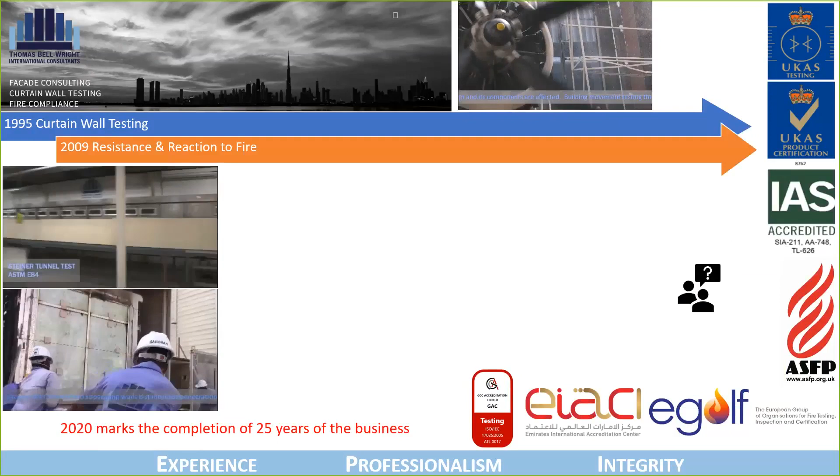We moved on from there to offer fire tests. We started offering fire tests by adding a furnace and a Steiner tunnel.

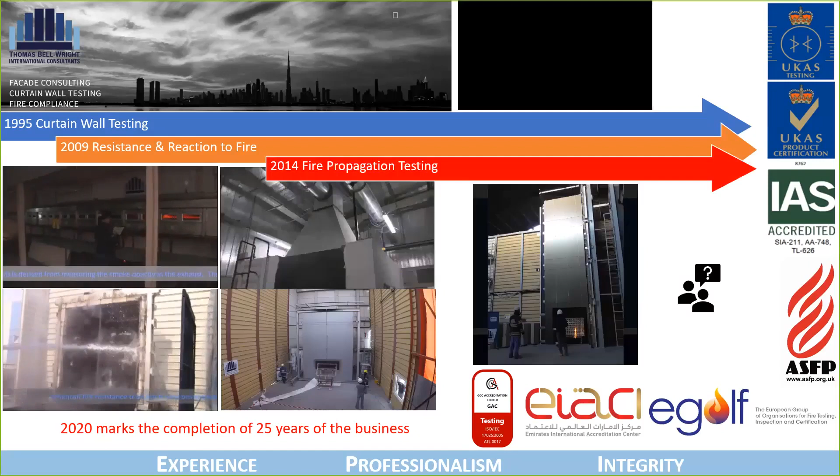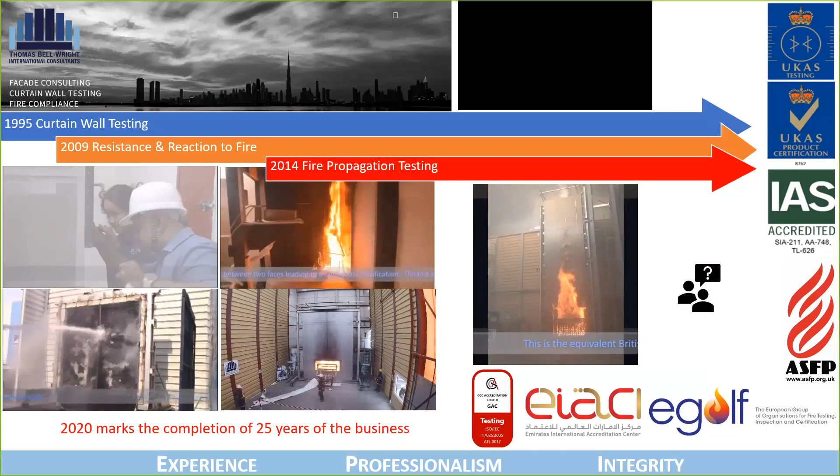We continued to add more and more capabilities. So we now offer reaction to fire tests and fire propagation tests for cladding material and cladding systems.

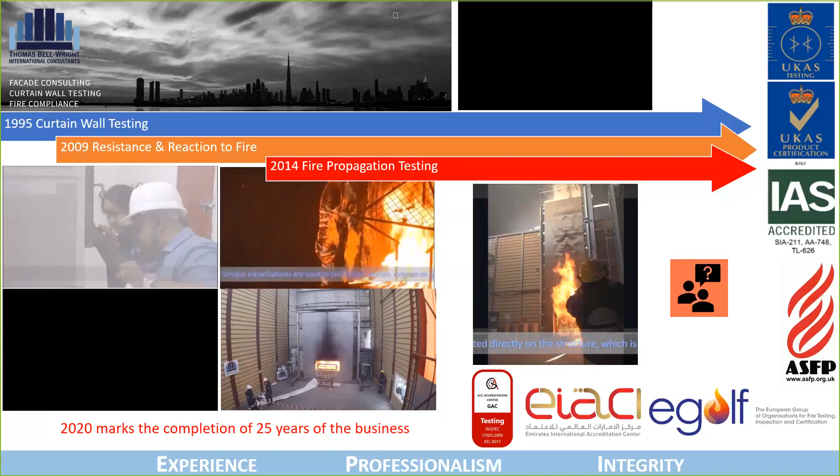Moving on, I will be straight away jumping into the topic of cladding and cladding fires. A lot of us are familiar with this challenge that has been in front of a lot of people in a lot of jurisdictions across the world.

We have been involved with several stakeholders in the industry who are related to cladding, whether it is manufacturers of materials, contractors, consultants, regulators, and so on and so forth. We supported the industry on the two-pronged problem that arose.

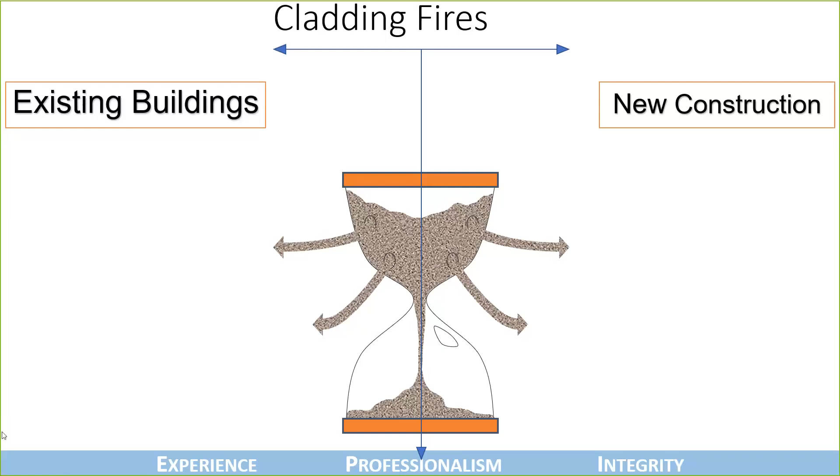The problem was for the existing buildings, and the problem was for the new buildings. For the existing buildings, we supported the development of a tool developed by NFPA from the United States. The tool was an offering that helped building owners assess the risk of their existing buildings.

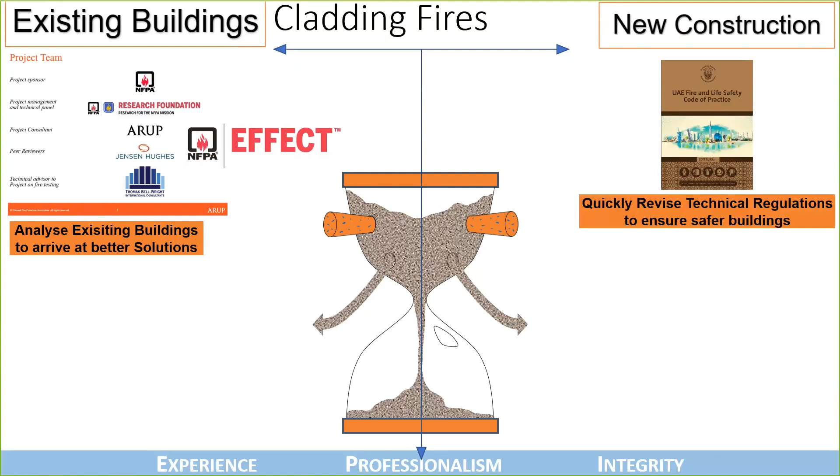We supported the UAE civil defense in enhancing their fire and life safety code. They came up with very detailed requirements for ensuring that cladding material being installed in new buildings is safer. We also launched our own certification program, becoming an accredited certification body to enable people across the industry to comply with the UAE Fire and Life Safety Code of Practice.

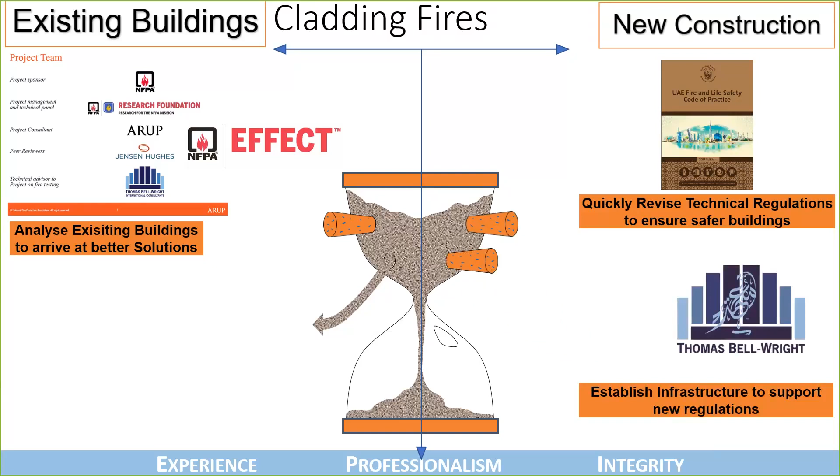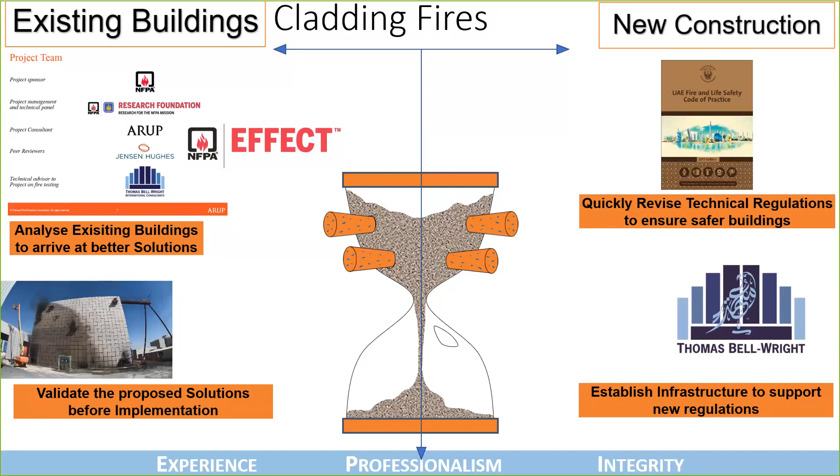With this as a background about us, I'm going to jump in and talk about risk. There are lots and lots of risks in the construction industry. As we talk very specific to risk related to facade fires, I'm going to touch upon some things which are very basic to the complete construction process.

This basic is the concept related to procurement or selection of what we buy. Now, irrespective of the function that we may be - as an architect, as a contractor, as a consultant, as a manufacturer of materials, or a regulator - we are all buyers in some or the other sense as human beings.

Now, as buyers, we buy everything and anything that we require. This ranges from electrical appliances for our homes, right up to products that we may require for our organizations and so on and so forth.

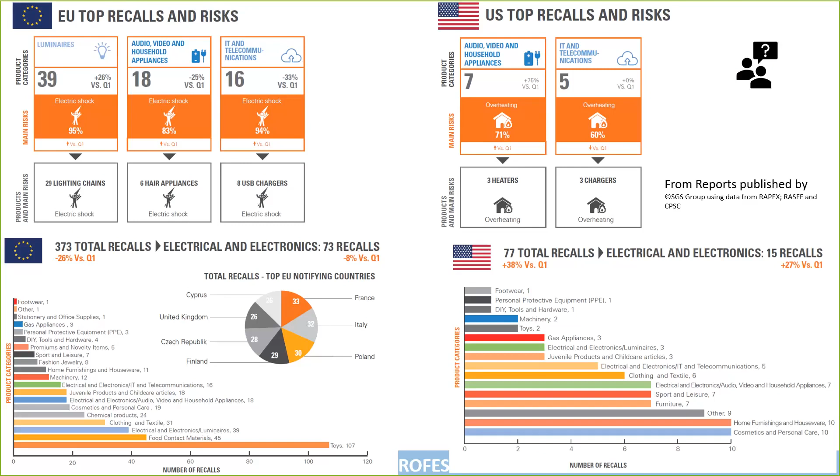A lot of us are familiar with the fact that jurisdictions have a very good mechanism for several kinds of products which are considered high risk for us. You will see some graphs and some data on your screens.

This is data that I have collected from a third-party body called SGS. You would notice that the bottom line on the graph talks about toys, which means this lists the total number of product recalls in the electrical and electronic segment. A good percentage of these products are recalled because they pose a threat to human life.

Now, for those who may not be familiar with product recall as a concept, many jurisdictions in the world have mandatory government laws which push manufacturers or suppliers to recall products that can pose a threat to anybody's life. So there is a system in place, which is a product recall.

I guess a lot of you would be familiar with product recalls, as the automotive industry and the consumer electronics industry has been rolling out many international product recalls. The Samsung Note was a classic case, but it continues across in terms of batteries being recalled, car parts being recalled, and so on and so forth.

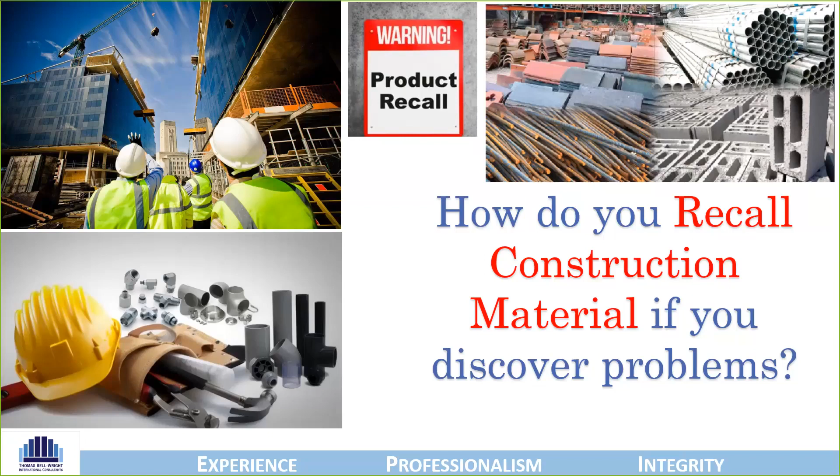This situation, that you cannot really recall products in the construction industry, has a very big repercussion. This forms the basis of the biggest risk when it comes to many different scenarios that can happen for any stakeholder in the complete construction process, fires being one of many, but there are several risks. Depending on the jurisdiction and legal framework you sit in as a supplier, developer, or contractor, you could face different kinds of risks.

Now, all of these risks eventually convert into potential risks and liabilities for several stakeholders. I'm going to walk you through an example of the fire risk in cladding, what the industry has been missing out on, and how that gap is being filled in by various tools around the world.

I'll take an example of the building envelope, from the time the elevation is visualized to the time the building envelope is commissioned. Obviously, there are lots of steps involved. Many of these have been analyzed as part of risk assessments and evaluations done to investigate accidents in the building envelope and facade space around the world, ranging from the Grenfell tragedy up to cases and decisions across Australia, and everywhere in between.

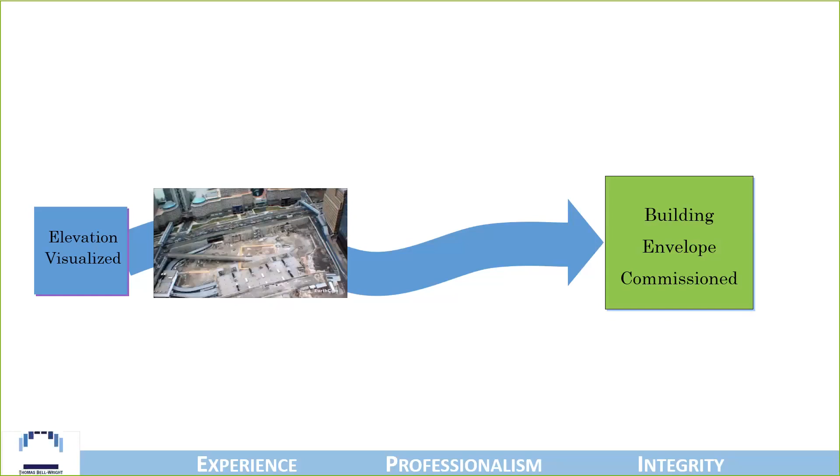I'm going to pick out four specific areas that have been reported or picked up in almost all these analyses. These are areas which have had lags in how the construction industry has operated, and these are areas that have led to liabilities coming across almost all stakeholders of the facade installation process.

It starts with understanding the property, or reaction to fire property, of material. A lot of people assumed their understanding of several parameters, whether we are talking of ignitability, combustibility, flame spread, and so on and so forth.

For the purpose of this workshop, I am avoiding getting into test methods, numbers, and standard numbers, because the range and spread of people who have joined this webinar are from several jurisdictions with varying local requirements and regulations. But the underlying theme remains very constant: for a cladding system to be designed fire safe, the basic building block is that the reaction to fire properties of each constituent material should be known.

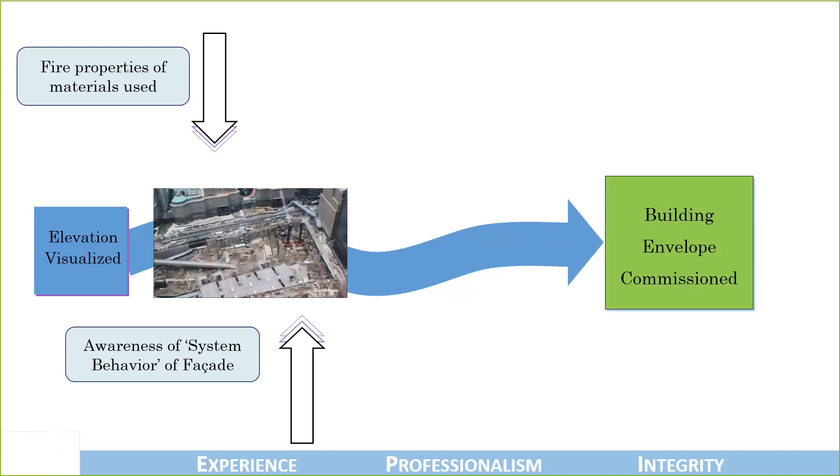But in reality, there is an evolved system property, or system behavior, depending on the air gaps and how the design has been built. The whole system behaves differently when it comes under the attack of a fire.

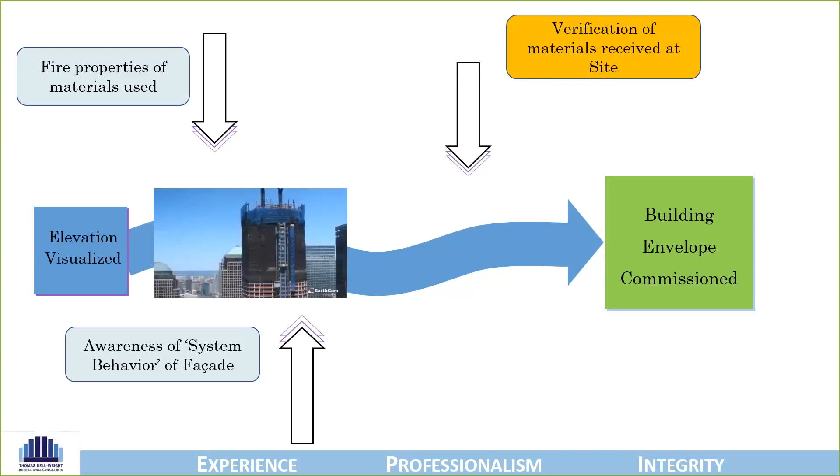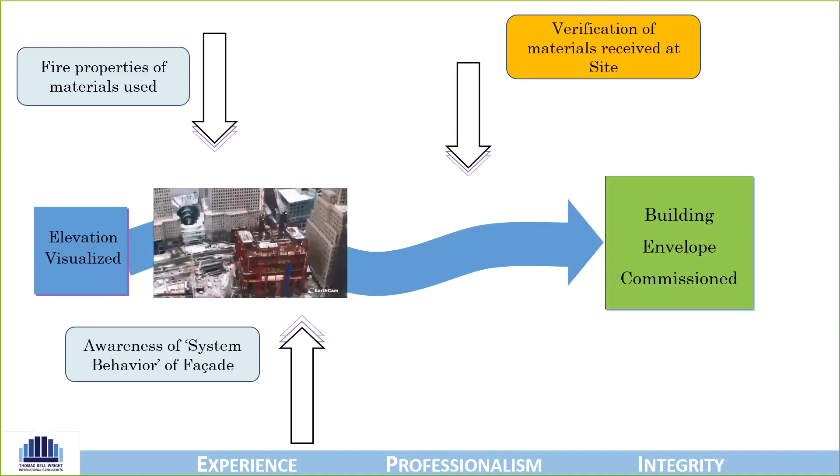A related situation: once a system has been designed, keeping in mind the properties of materials and that there is a system behavior, there is a challenge related to how to ensure that the materials that have reached the construction site are exactly what were designed.

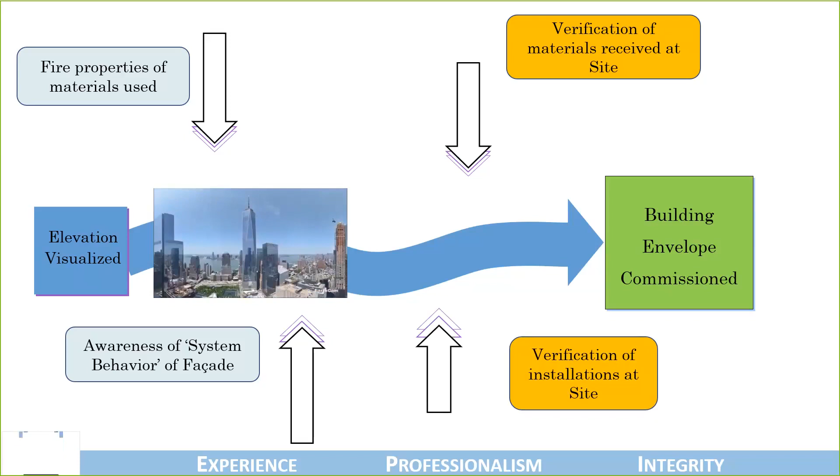And of course, with everything in place, how do you really verify and validate that the installations are being done as per what is understood to be a safe system? Now I'm going to talk about these four factors and how they affect liability for several stakeholders.

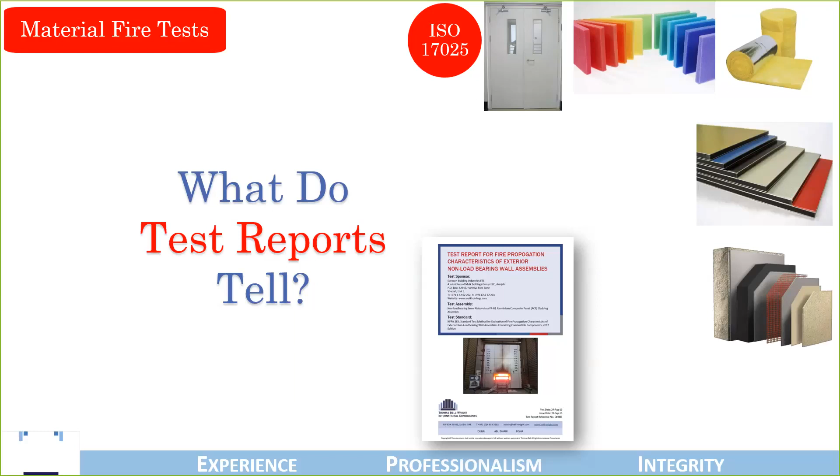Now, several countries, several jurisdictions have now moved on to a concept of certification and listing. I would like to draw the attention of each one of you to a very basic point of why this shift has happened or has been happening.

A test report is a document which defines how a specific material behaved in the context of a specific test environment, and reports the result.

But it does not in any way define how many tests were undertaken before that test which resulted in the test results which are declared or shared. Neither does the test report link the supply of material to be done at the construction site, on a forward contract, with the results of the test.

And this is what has been used as a gap. The concept of certification and listing, which may already be known to a lot of you, fills in this gap as much as possible.

Certification bodies, typically accredited by third-party accreditation bodies, take on the role of visiting manufacturers and checking how a sample is being manufactured, typically signing off with a mark or marking to define traceability. Once this is done, the sample where traceability has been established is tested. Once the test results are positive, which could take more than one iteration, the certification body goes back to the factory regularly, and as part of the audit mechanism, continues to audit the quality and production control mechanisms, all the processes that ensure repeatability of production.

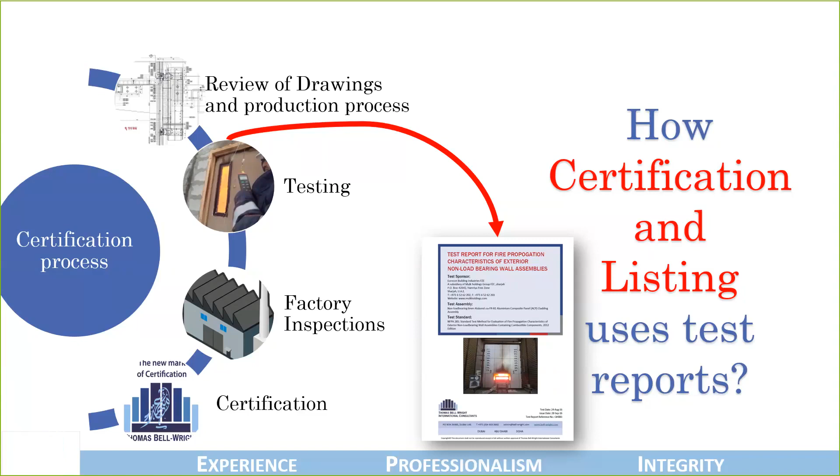What this results in is a certification and listing. A certification and listing is not just a certificate that can be shown around. It is a listing in the form of a live document which is available to be verified on the web portal of the certification body. The certification body is supposed to publish this.

Long ago, and maybe till now as well, the Red Book was published in the UK as certification proof. Now, several certification bodies around the world have resorted to an online listing where you can not only verify the product which has been tested and is demonstrating compliance to a specific set of standards, but it also lists the manufacturing facility, and gives a traceability or certification number which can be verified when the product or material is supplied to the construction site.

This is very important to understand, as this is the tool, the tool which can be specified, which needs to be used by various stakeholders to ensure that products and materials that have been specified are the products and materials that are received on the construction site. The certification and listing provides this feedback loop. In several cases where system tests are performed, certification bodies often also list general drawings of the configuration in which the system has been tested.

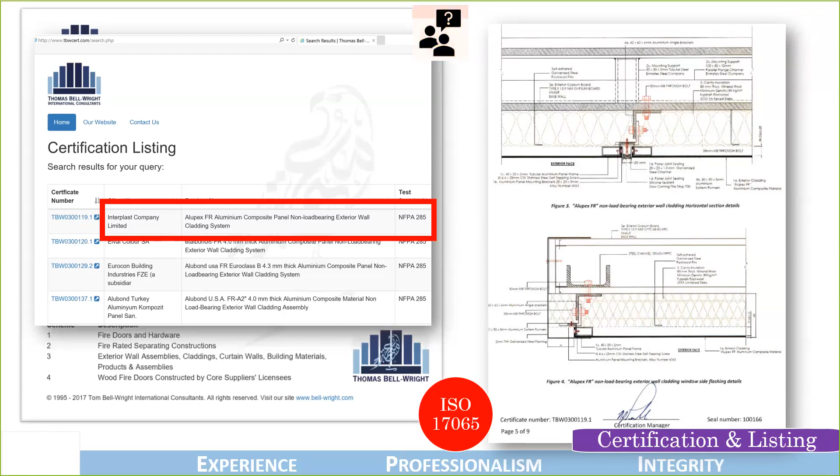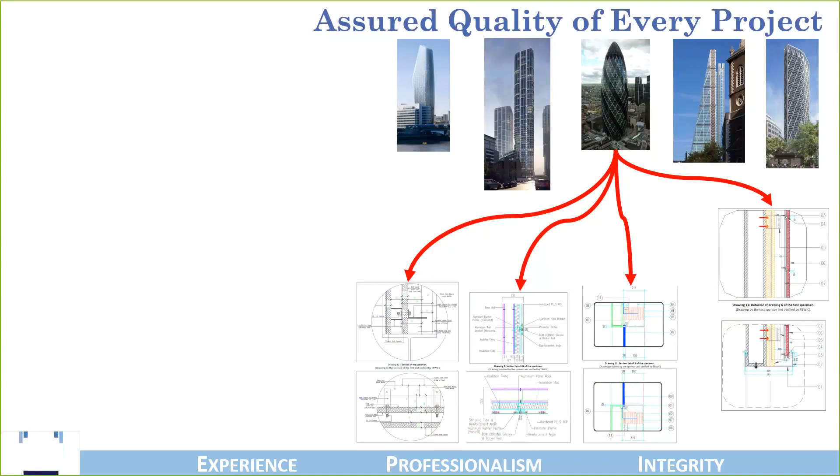Now that we are aware of how to ensure that the products which are being designed exist and can have traceability, let us try to attack the situation which has been arising everywhere. People from the facade industry and the cladding world know that it is very normal for any given facade system to have hundreds of drawings, if not in some rare cases even thousands. What these drawings do is capture an extremely large number of details that possibly exist, and do exist, when it comes to cladding systems and cladding designs.

Now, this is another area where a potential liability can arise. It is extremely critical and important that the correct stakeholder with the correct understanding is given the responsibility, and that stakeholders use the right tools to mitigate their potential risk.

In a typical scenario, hundreds of drawings are reviewed and narrowed down to a very few where potentially combustible materials are there as part of the systems, and the design element of the cladding system is used to decrease the risk caused because of combustible materials or materials prone to ignition.

I must put this in place that facade systems and cladding systems are prone to having materials which will catch fire or can catch fire, because if we do not use these materials, we may not be able to achieve some of those properties which are now required.

But without delving into that segment, I'm going to move forward and talk about the large-scale fire propagation tests that are available and are used to test one or several instances of cladding system designs where there is a potential risk of fire.

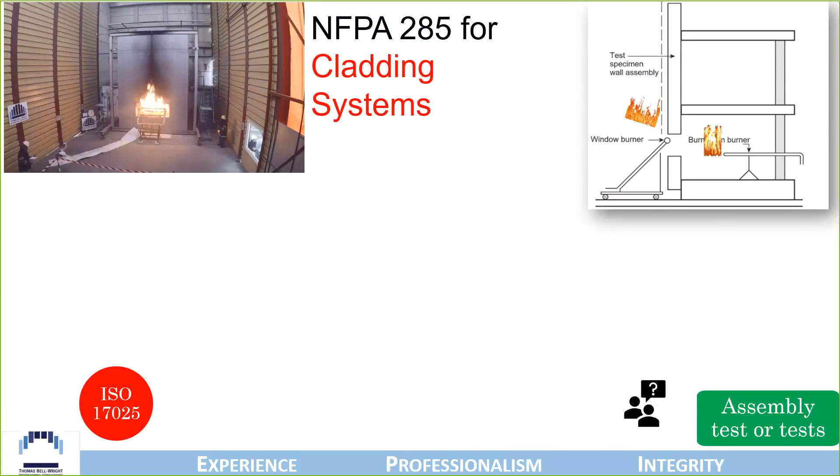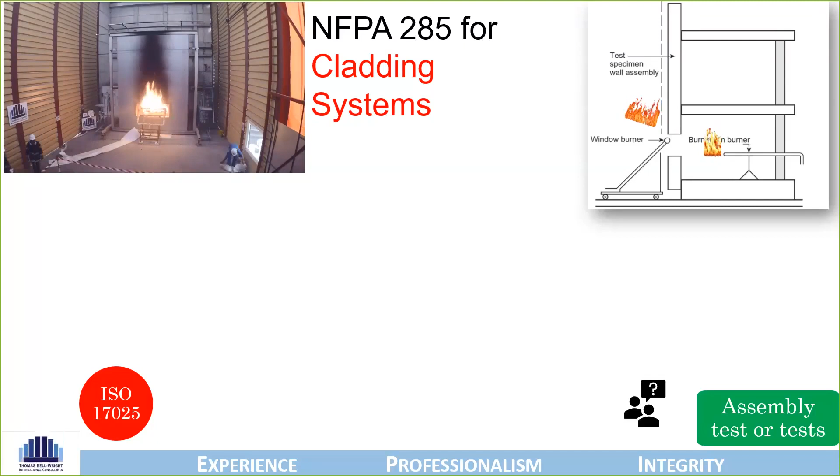On the top you would see a video of the NFPA 285 test, an American large-scale fire propagation test. There are close to 15 or 20 large-scale fire propagation tests used by jurisdictions around the world, several in Europe, few in North America, and so on. But the NFPA 285 test and the BS 8414 are among the more commonly used ones in the world.

The NFPA 285 test, as you can see on your screen with the videos running, shows a mock of the test happening. It uses a gas-fired room burner on the ground floor, as you can see on the right side of your screen, and a window burner. Together they create what is called a leapfrog effect, or they simulate the leapfrog effect.

A similar test or scenario is created, similar in intent, by the British standard. The British standard uses a wooden crib and has an L-shaped wing as well.

It is a very time-consuming debate if someone asks me to compare these two test methods. They are comparable in intent, and of course comparable in content as well, and in how currently different systems would perform when put in front of the test.

I can only add that we have tested systems which have passed one test and failed the other, as well as vice versa, which may come across as a bit worrying to people. But in reality, people who understand these large-scale fire propagation tests should be able to use the correct test and the results appropriately.

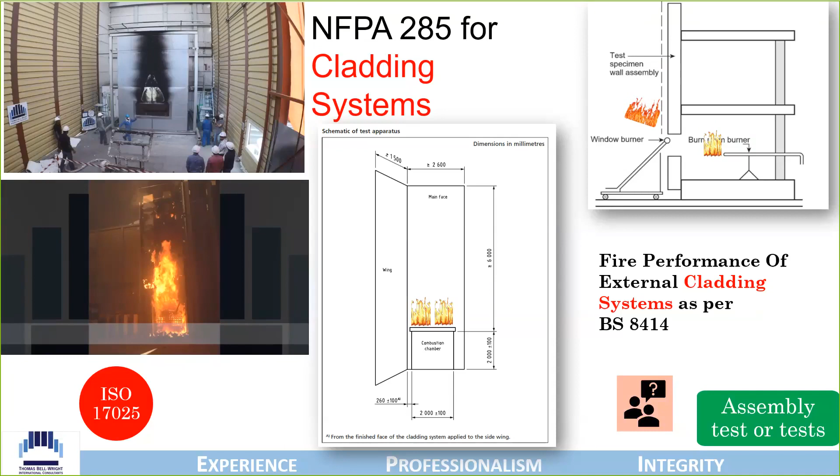Moving forward, you must have had a quick peek at the results. Moving forward is the last point, which is equally important as others, which is inspections.

We know that we have the right tools now to assess and ensure that the products, the materials used to design the facade system, have a tool to go and check back that it is the correct product that was not only prescribed and ordered, but also inspected at the construction site, and that the correct order from the correct manufacturing location was received.

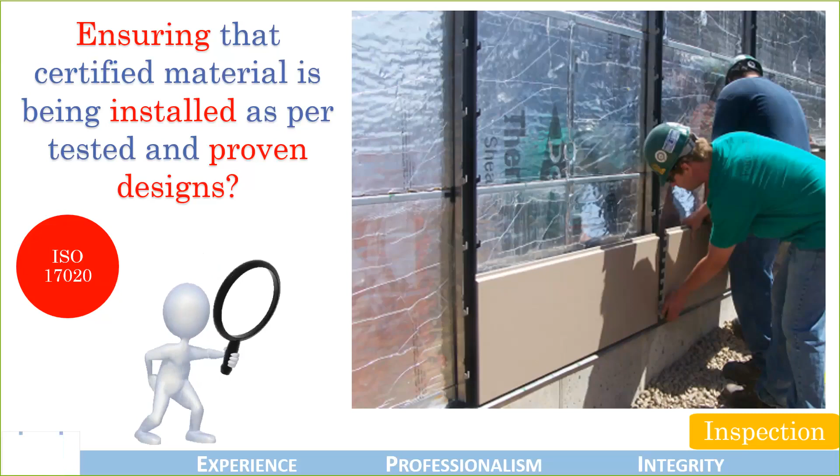You have a mechanism to evaluate the risk of the 1 or 10 most riskiest sections of the cladding system by conducting one or several tests that need to be done. And now we must understand that whatever we believe is appropriate is the way it is getting installed on the construction site. On the screen, you may see some potentially disturbing images.

So it is very, very critical and very, very important that the inspections are done through the course of the installation, to ensure and check that whatever has been approved, whatever we believe is correct, is how materials are installed.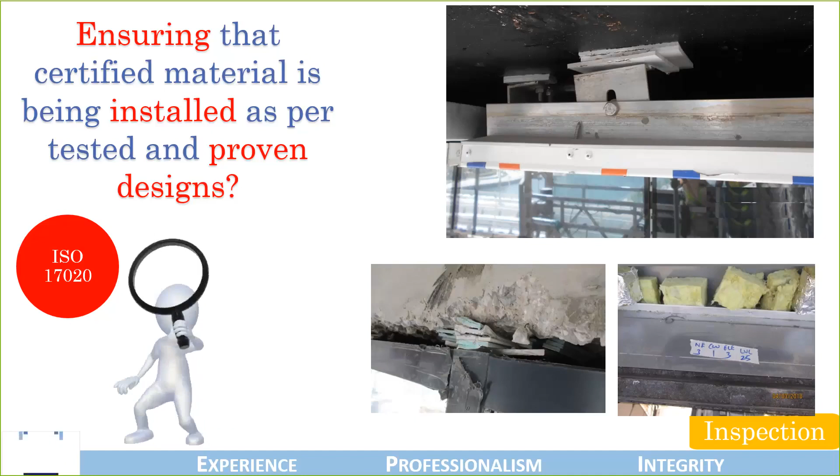ISO 17020 is the standard which helps people selecting inspection bodies choose and bring them at par, and ensure that there is an independent check for the inspection body of someone who is evaluating them to be independent and capable of conducting the inspections.

So I would like to close with a final slide which summarizes these tools which are available to all of us.

By a summary slide, I'm summarizing an overview mechanism which is followed now by several codes in the world as a process or a method to ensure the mitigation of risk.

When the system is designed, a risk assessment is being conducted wherein fire consultants, facade specialists, contractors, some of them or all of them, are given the responsibility as well as the liability of checking and ensuring that the system is designed using the correct materials.

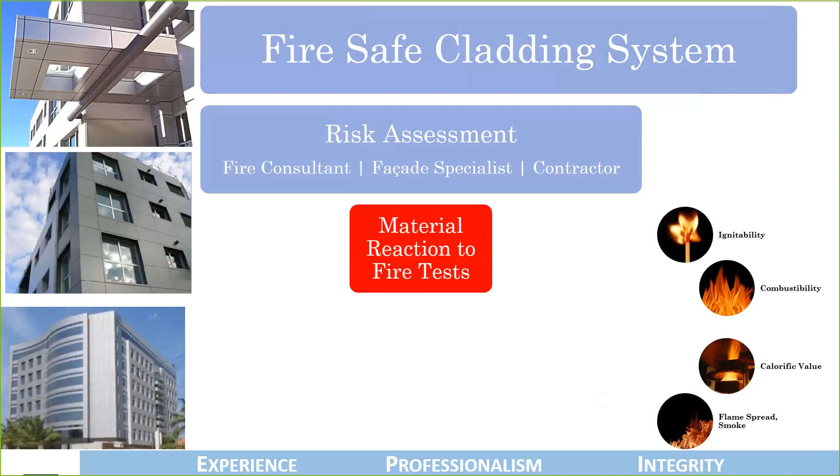The concept of certification and listing is used in contracts and technical specifications to ensure that what is being specified, is being specified correctly.

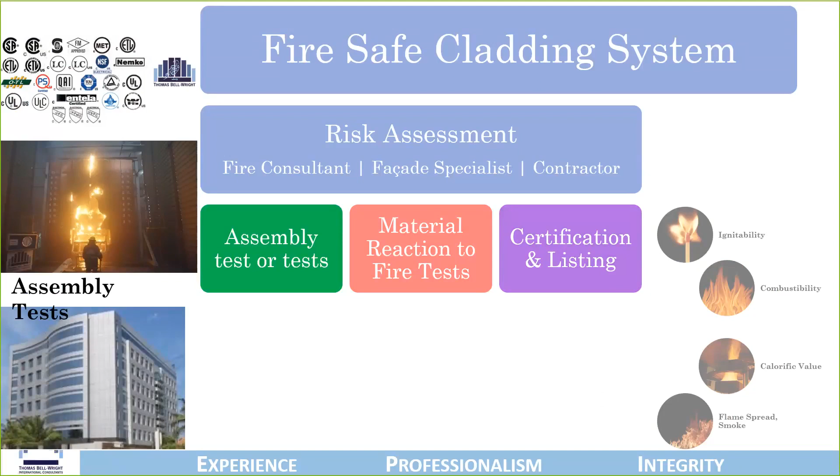A set of assembly tests, or one test, is conducted to validate and check the potential risk that may exist in some systems when they are designed.

And while the installation is being conducted, there is an inspection that is conducted in parallel, and the inspection body is authorized to do this.

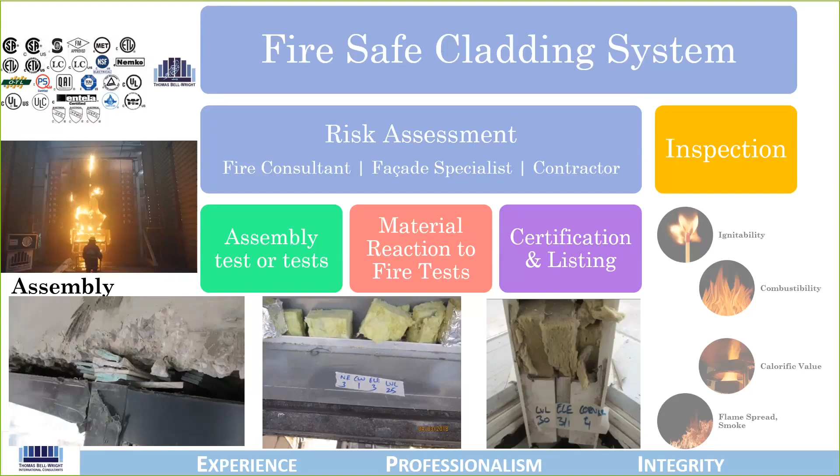So this is a summary slide, and I'm going to open the last poll question to all of you to get your current understanding of who is responsible and who is liable when it comes to potential risks that are arising. And I'm going to leave you with this screen which lists the standards which help you understand an inspection body,

a testing body, and a certification and listing body, but how they are at par or not.